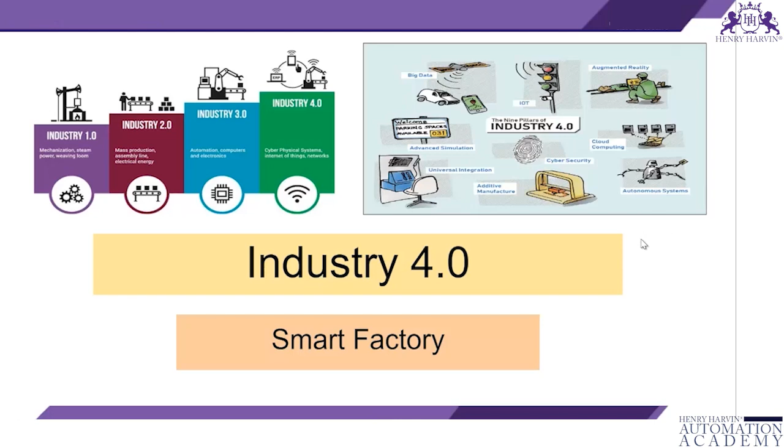In this video, we will try to understand what is a smart factory, what makes a factory smart, and how smart factory has revolutionized manufacturing.

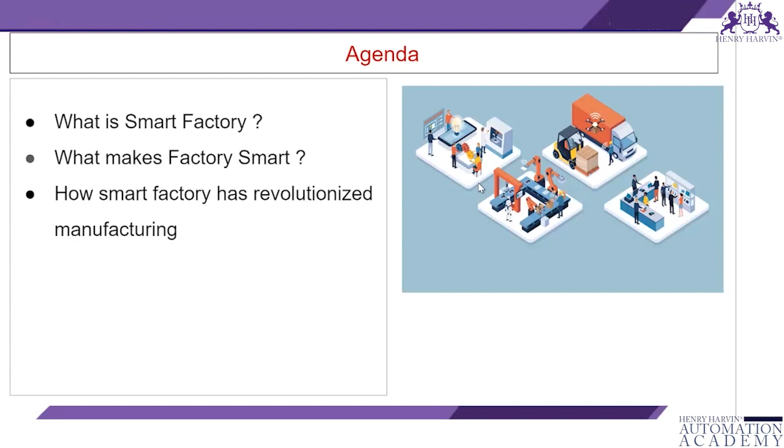The term also describes a highly digitized and connected environment where machinery and equipment are able to improve processes through automation and self-optimization. The benefits also extend beyond just the physical production of goods into functions like planning, supply chain logistics, and even product development.

Smart factory: a smart factory is a concept for expressing the end goal of digitization in manufacturing. The way the term is most commonly used, a smart factory is a highly digitized shop floor that continuously collects and shares data through connected machines, devices, and production systems.

And you can see from a block diagram, you have a lot of the IoT devices where the data is getting collected from the production processes.

In this concept, a smart factory has interoperable systems, multi-scale dynamic modeling and simulation, intelligent automation, strong cyber security, which is important since the data is getting transferred, and networked sensors.

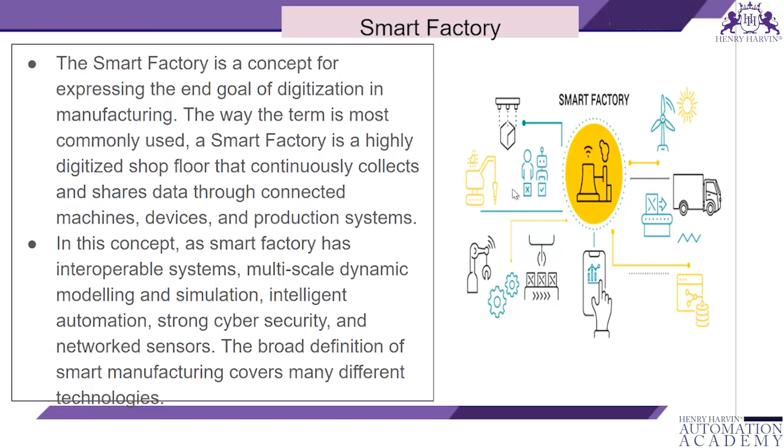The broad definition of smart manufacturing covers many different technologies. Let us try to understand a smart factory from a video presentation.

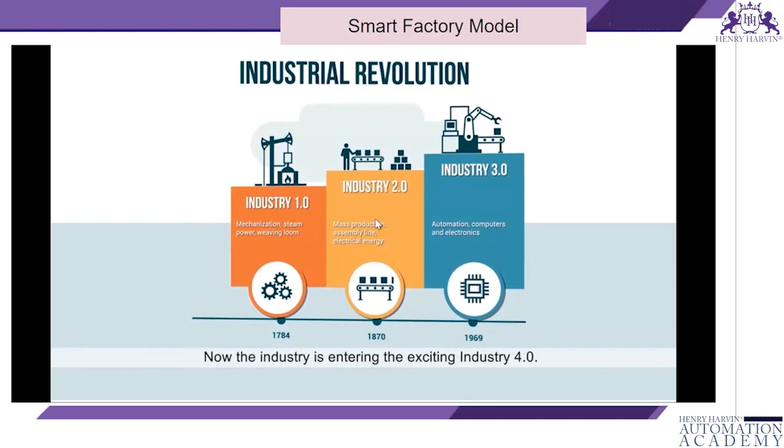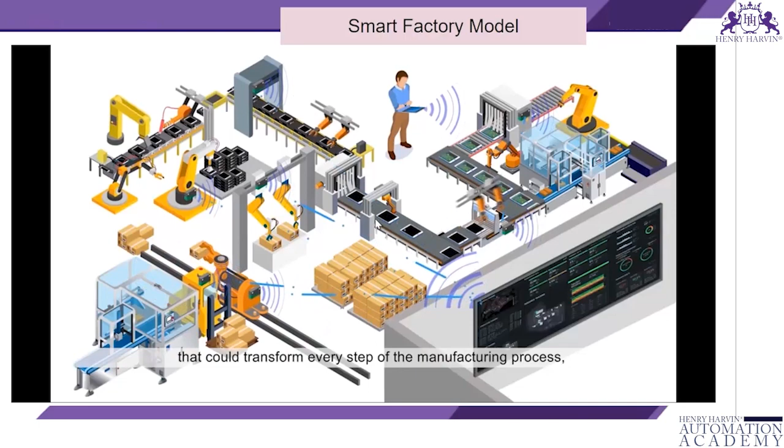The manufacturing industry has undergone significant revolutions. Now the industry is entering the exciting Industry 4.0. It is a transition powered by data and automation technology that could transform every step of the manufacturing process, from the supply chain and enterprise to the shop floor and end users. The goal is to drive productivity and innovation and empower businesses in an integrated, data-driven manufacturing environment.

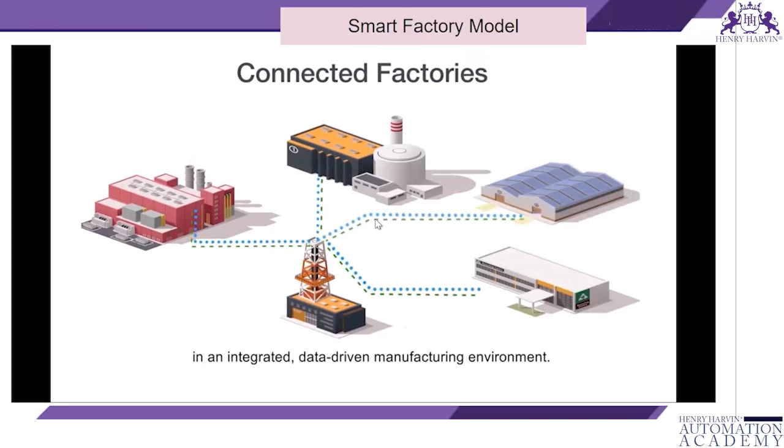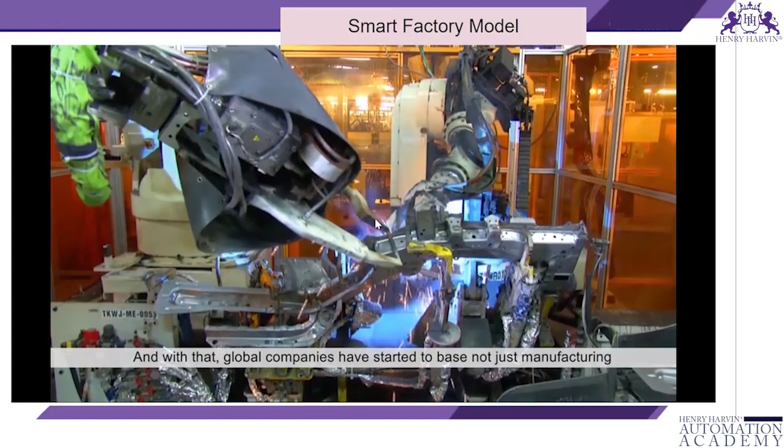Asia is now occupying, or has in fact taken, more than half the global share of the economy. And with that, global companies have started to base not just manufacturing, but even local product development and designs within Asia in key locations, including Singapore.

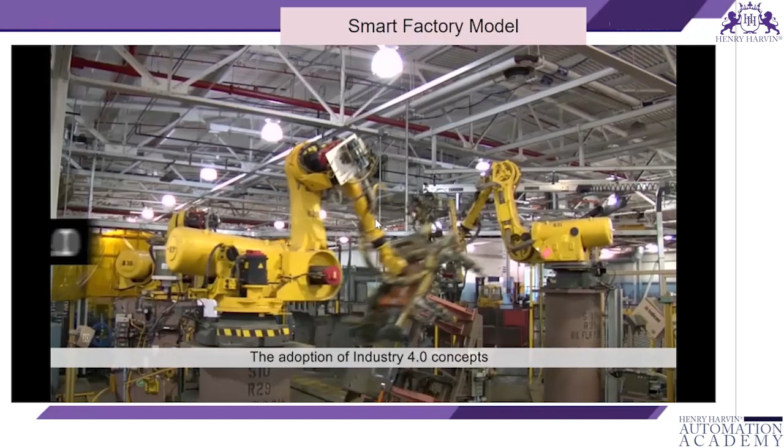We do see that the need to move up the value chain for manufacturing, the adoption of Industry 4.0 concepts is going to be a lot more pervasive.

For the central government, the manufacturing domain is one in which we are very heavily committed in, having committed close to about 3.3 billion Singapore dollars, which is roughly about 2 billion euros, to fund public-private partnership R&D activities between the states through agencies such as A*STAR and the private sector in Singapore.

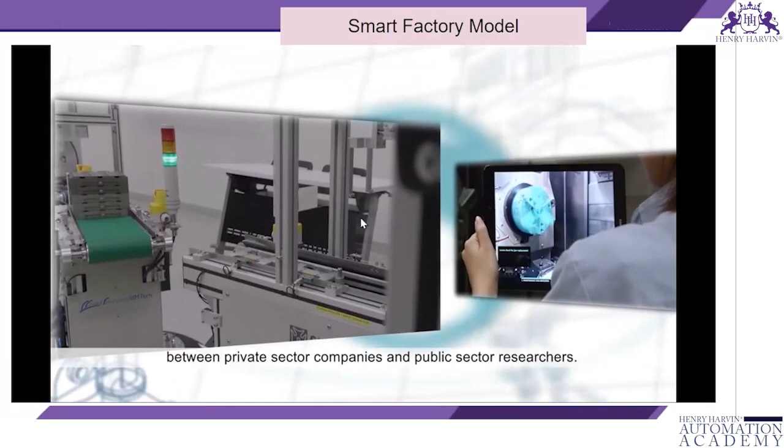The A*STAR Model Factory is an immersive learning environment which allows companies to experience and experiment with advanced manufacturing technologies before adoption on the factory floors. This is a platform for co-creation and co-development between private sector companies and public sector researchers.

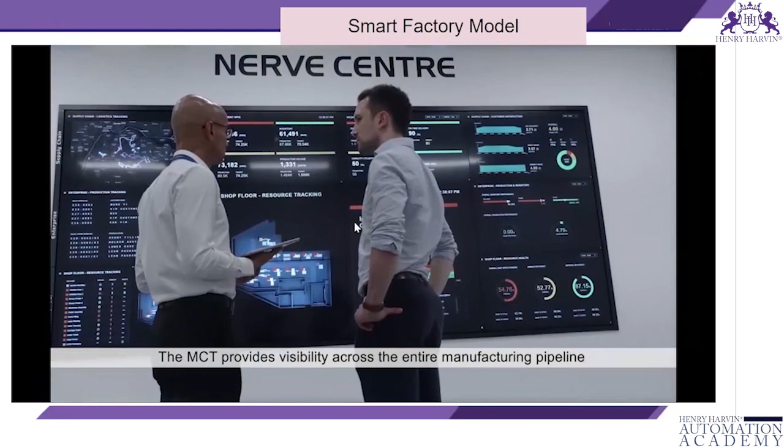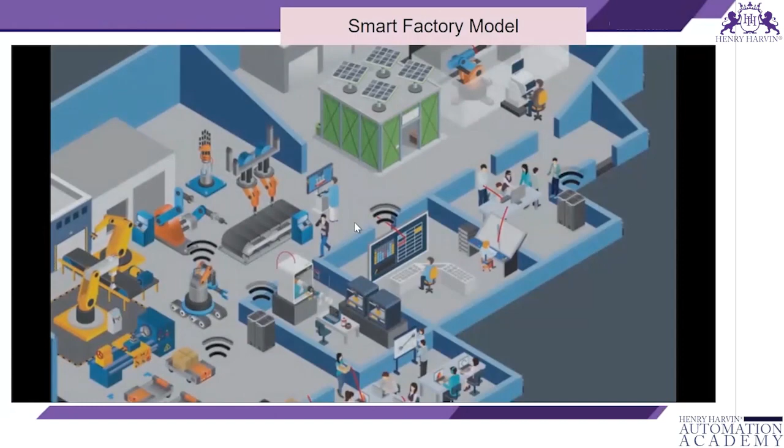The Manufacturing Control Tower is the nerve center of SIMTech's Model Factory. The MCT provides visibility across the entire manufacturing pipeline as data is automatically collected, integrated, and displayed through smart IoT technologies. It creates a connected, data-driven manufacturing environment that empowers faster problem diagnosis and informed decision-making.

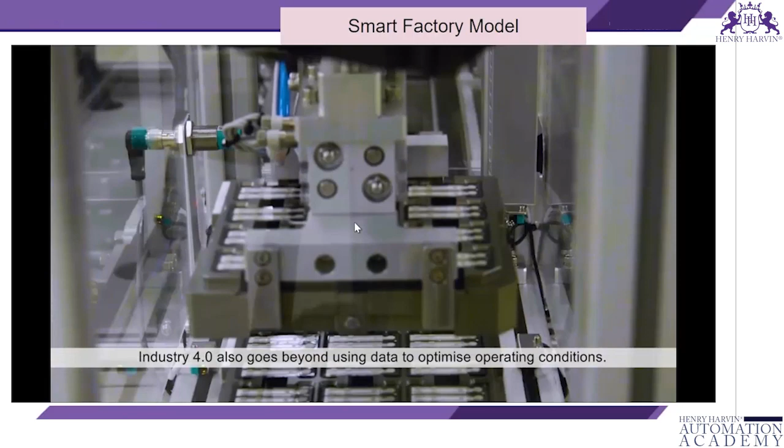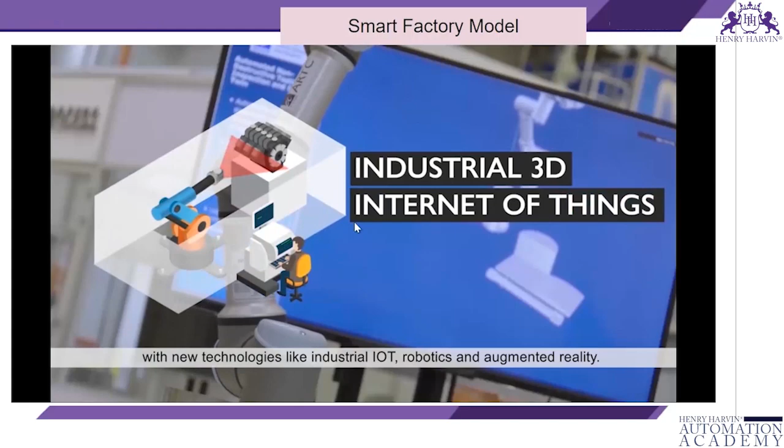Industry 4.0 also goes beyond using data to optimize operating conditions. The Model Factory explores the creation of intelligent networks along the manufacturing chain with new technologies like industrial IoT, robotics, and augmented reality. These smart networks transform manufacturing processes like production and assembly, repair and maintenance, as well as help with effective training.

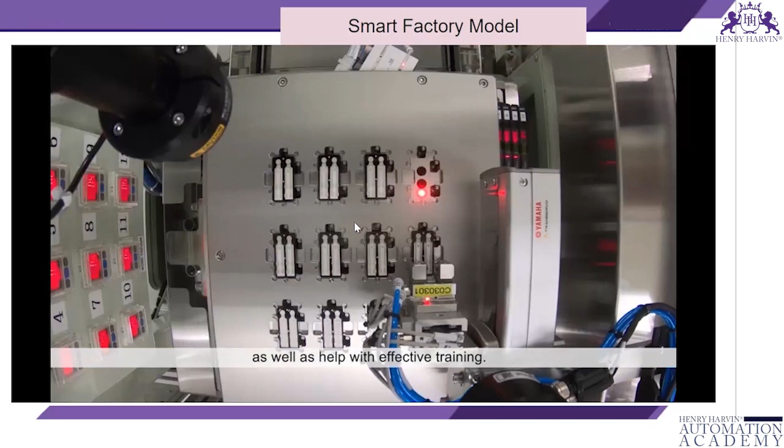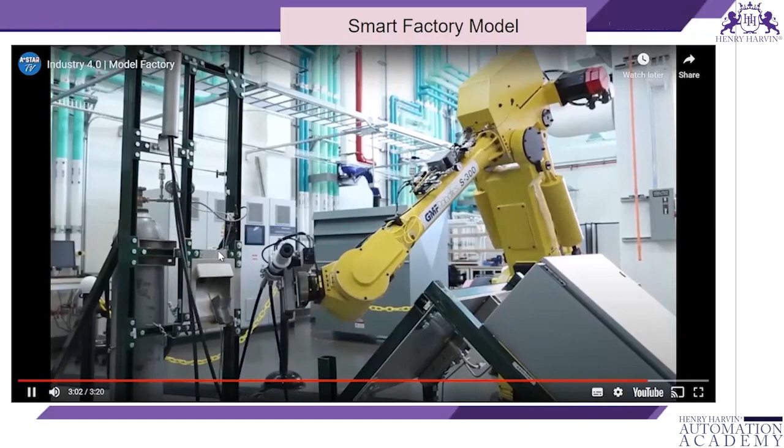For companies looking at new opportunities, new areas, and new locations in the world, Singapore is a good location to enter Asia. We are here to provide the public sector support for companies to embark on Industry 4.0. The future of manufacturing is here.

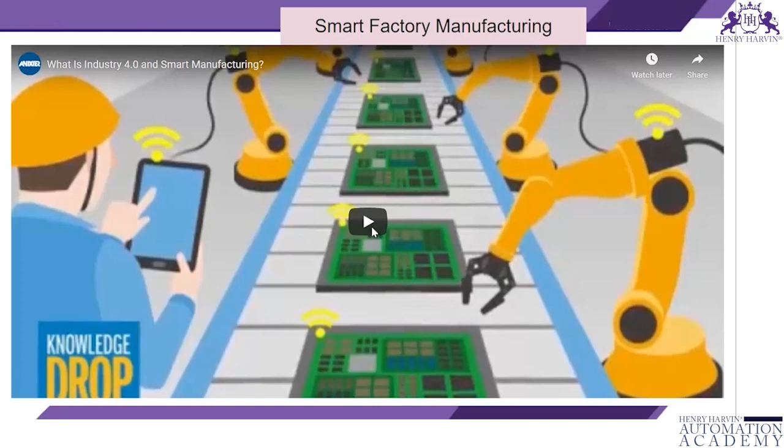So here in this video, we saw how Singapore has really moved ahead for smart manufacturing domains. Let's look at one more video which talks about what is Industry 4.0 and smart manufacturing. These videos help you through the animation, and help you know about how smart manufacturing is changing the way industry works today.

Hi, I'm Clay Coburn. The Internet of Things touches every facet of business today, and manufacturing is no exception.

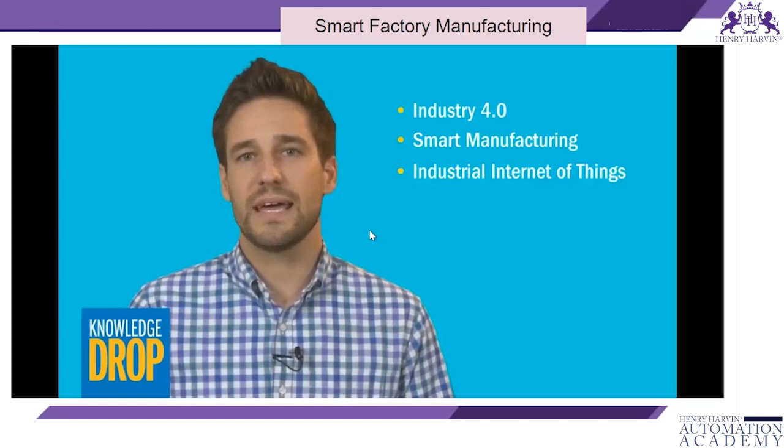McKinsey estimates that by 2025, the total economic impact of the Internet of Things within factories will be up to $3.7 trillion per year. You've probably heard of Industry 4.0, smart manufacturing, and the industrial Internet of Things. These are all ways of describing the intersection of operational technology and information technology to monitor physical processes within manufacturing and use data to make predictive, corrective, and adaptive decisions to improve operational costs.

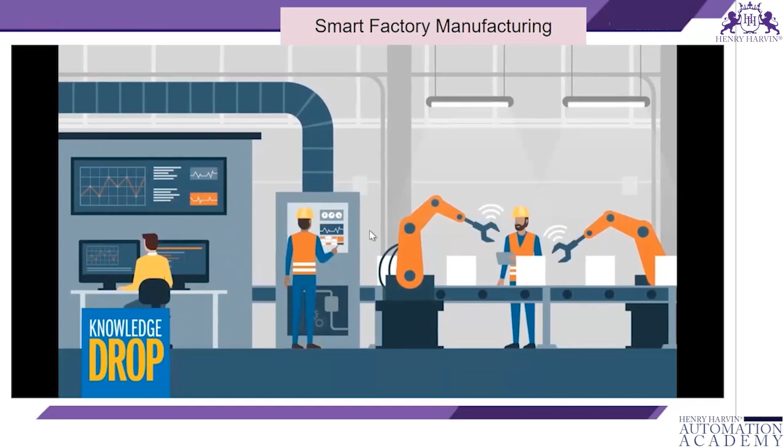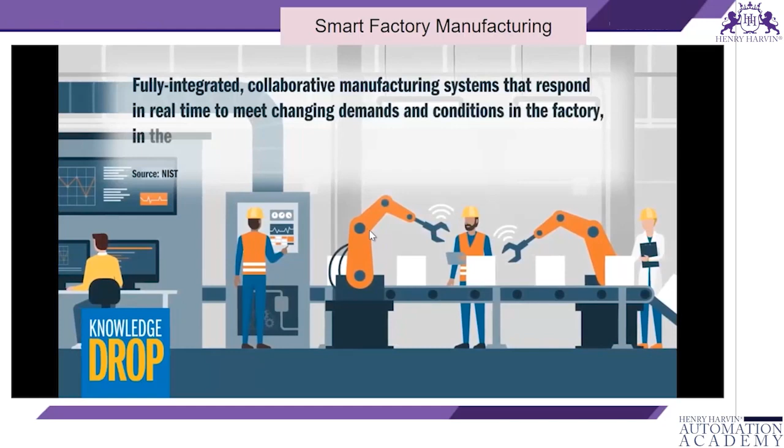Industry 4.0 refers to the fourth industrial revolution and specifically the move towards smart manufacturing. The National Institute of Standards and Technology defines smart manufacturing as fully integrated, collaborative manufacturing systems that respond in real time to meet changing demands and conditions in the factory, in the supply network, and in customer needs.

Adopting Industry 4.0 requires both horizontal and vertical data integration across the business. Vertical digitalization may include manufacturing, procurement, supply chain, design, product lifecycle management, logistics, operations, and quality, all integrated for seamless flow of data. Horizontal digitalization may include data integration with suppliers, customers, and key partners. Achieving integration requires upgrading or replacing equipment, networks, and processes until you have a seamless digital ecosystem.

Of course, it's not enough for your systems to be fully integrated. You also need solid data services and analytics to turn the information being generated by your systems, sensors, and machinery into actionable insights that can provide a return on investment.

With the adoption of connected systems, you also face increased cybersecurity risk. This is why adopting Industry 4.0 requires close collaboration with the IT experts in your organization, working with you to implement cybersecurity best practices across your digital ecosystem.

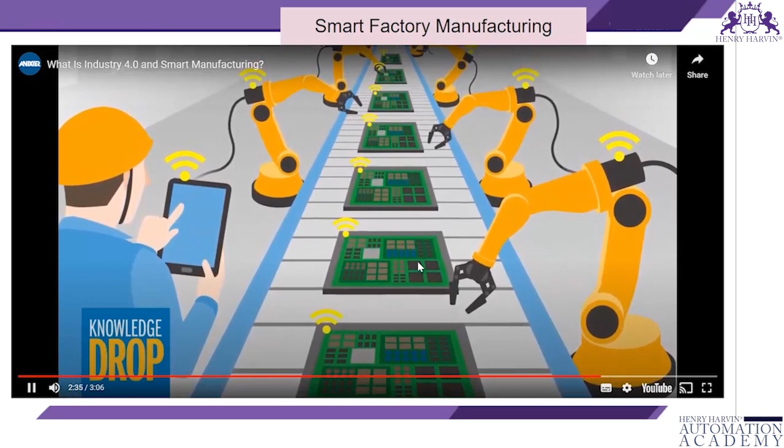One of the most important keys to adopting Industry 4.0 is the internal cultural transformation in your organization. This requires strong leadership that is committed to change management and investing in the necessary technology and education to successfully adopt smart manufacturing practices. All of this may seem like a huge investment, but the significant operational cost improvements often pay back the investment in just 2 years.

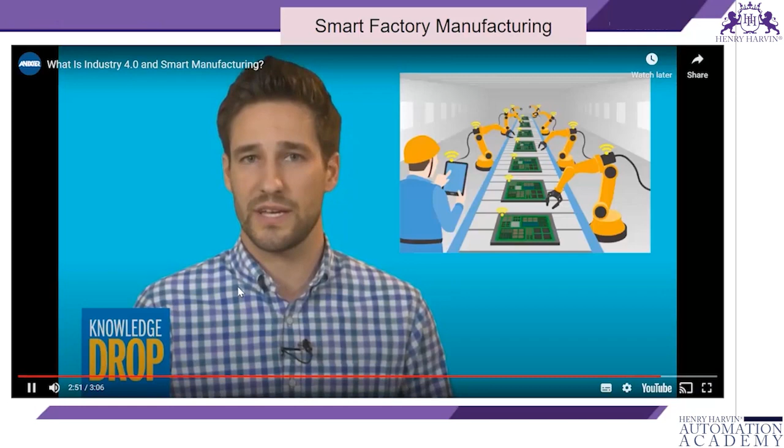With Industry 4.0 practices in place, you can compete with anyone in acquiring and retaining customers thanks to your enhanced organizational operating efficiencies. I invite you to read our tech brief on this topic and talk to one of our technology experts.

So here again, we saw how smart manufacturing is being used by the industries, about how Industry 4.0 could be implemented in your organization.

Let's look at smart factory elements and see what makes a factory smart. So we can see a smart factory at the core of it, and we have devices, we have humans, and then we have a product which is being manufactured. And then we have Internet of Things, and to be more specific, it is Industrial Internet of Things, which integrates your smart logistics, smart processes.

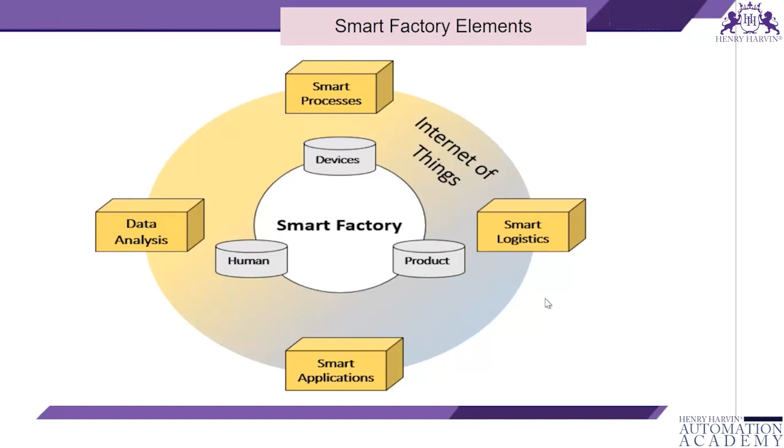It collects the data and does analysis with that. And we have smart applications to process this data and guide how the processes should be held here. So these are the elements of a smart factory, which any organization moving into this smart factory concept.

If we look at components of a smart factory concept, smart factory is where physical production processes and operations are combined with the digital technology, smart computing, and big data. In this concept, a smart factory has interoperable systems, multi-scale dynamic modeling and simulation, intelligent automation, strong cybersecurity, and network sensors.

The broad definition of smart manufacturing manufacturing covers many different technologies. So when we see the components of a smart factory, it includes automation and informationalization in all phases, that is called digitization.

It believes on minimum cost and time. It also helps production of customized products. It saves the energy. It is based on smart IoT technologies. Planning, design, production, distribution, sales gets automated and more optimized. There is a connection of all elements in a factory. It's an interconnected factory, and there is an increased productivity, which is ultimately the goal of any production unit.

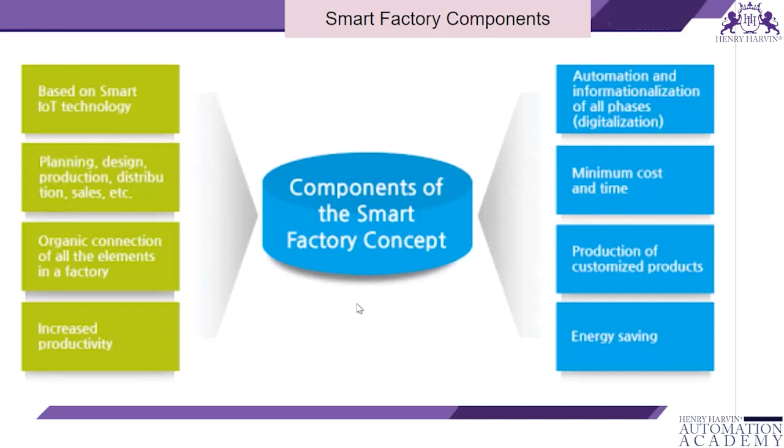So here we see a smart factory, how important it is in Industry 4.0, and it basically consists of all the pillars of Industry 4.0, improving the productivity and bringing the efficiency in an organization overall, bringing growth to it. Smart factory, the fact it's an ecosystem of the future.

It is an application of industrial Internet of Things built with sets of hardware and software that collectively enable processes to govern themselves through machine learning and cognitive computing. Thank you for viewing this smart factory concept in Industry 4.0.